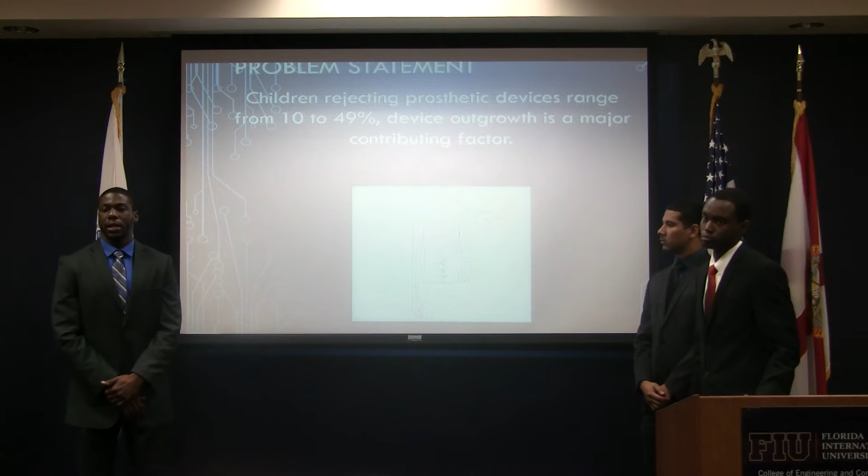It's been recorded that children have been rejecting prosthetics at a rate of 10 to 49%. This has been attributed to the fact that device replacement normally takes place 6 to 12 months after the initial fitting. Many factors have contributed to this, however, device outgrowth is the predominant reason.

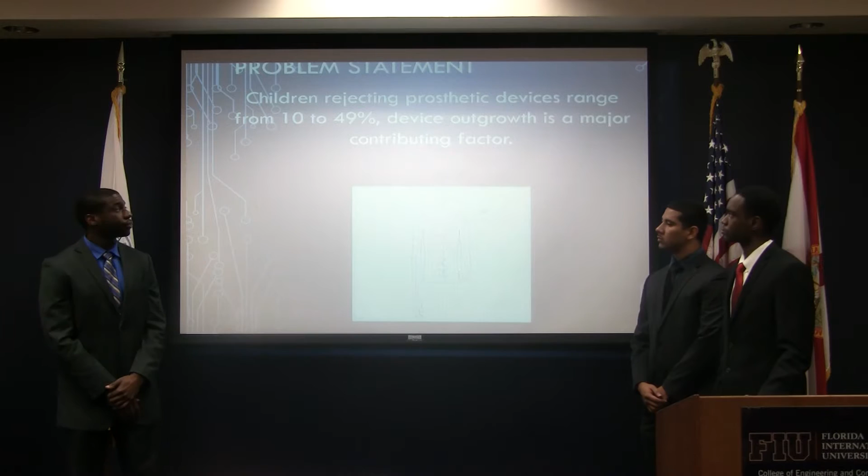To resolve these issues, we created a below-elbow prosthetic limb device that satisfied two goals. It was targeted for children between the ages of 5 to 12 years old, and it incorporated adjustability of limb length and addressed the issue of discomfort.

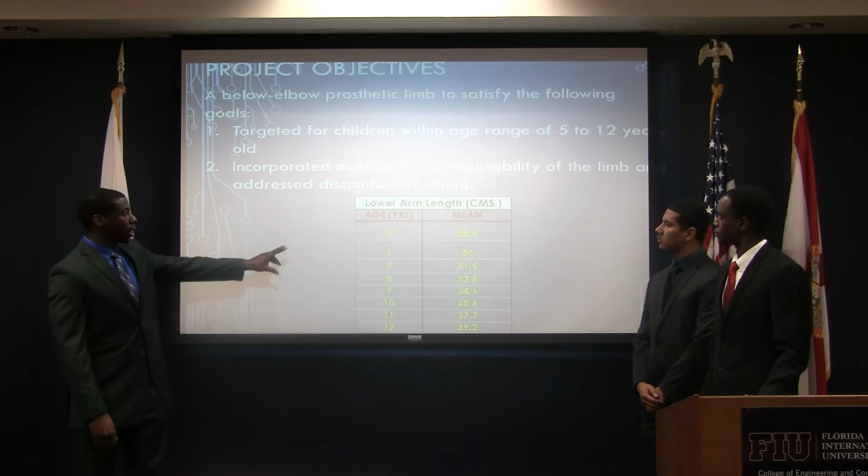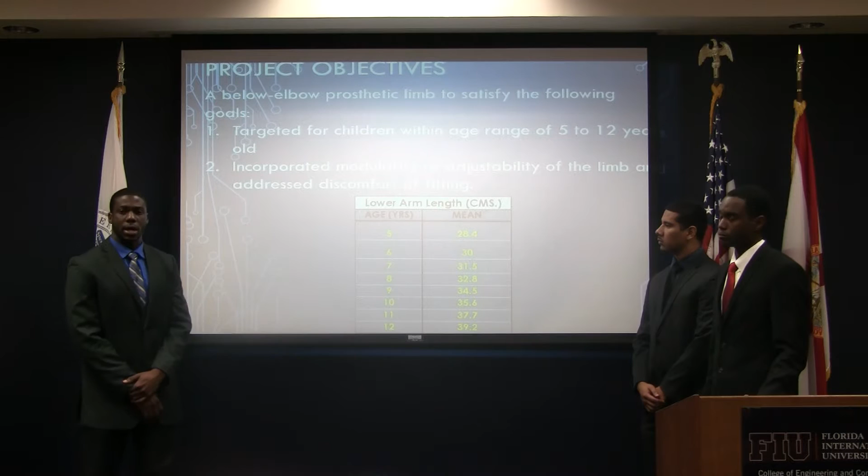As you can see from the table, between the ages of 5 to 12 years old, there's about an 11 centimeter limb difference. For our model, that's too large a gap to factor in, so we decided to divide this age group into two subsections: 5 to 8 years old and 9 to 12 years old. For our project, we're focusing on the 5 to 8 years old model.

The division of responsibilities are as follows: I was responsible for fabrication and documentation, Chris was responsible for testing and documentation, and Finley was responsible for engineering design and documentation.

To clearly define our project objectives, we divided our project into two phases. The first phase involved modeling the prosthetic using appropriate CAD modeling software, such as SolidWorks and ANSYS. In doing so, we conducted engineering analysis by comparing and contrasting materials we could use, assessing the physical limits of our design using finite element analysis, and optimizing our design before furthering on with prototyping.

For the second phase, we developed a terminal device - in our case, a hand. In doing so, we wanted to make our testing more human-like, and for this hand we actually created a mechanical driving mechanism as well.

In order to develop a functional prosthetic marketable to amputees, we had to abide by standards set by both the health system as well as engineering standards. In general, prosthetics are classified in classes, and our prosthetic is a class 1 type prosthetic.

The regulating body that determines whether a prosthetic can be brought out to the market is the FDA, and the critical standards used in the design process are pretty much the same standards as they relate to the process of making plastic parts, as well as the testing methods of plastic materials.

At onset, we established design alternatives for the socket and the wrist. After researching different types of sockets and forms of attachment, including the Wilmer open socket, silicone suspension, vacuum suspension, and osseointegration, we decided to proceed with the Wilmer open socket.

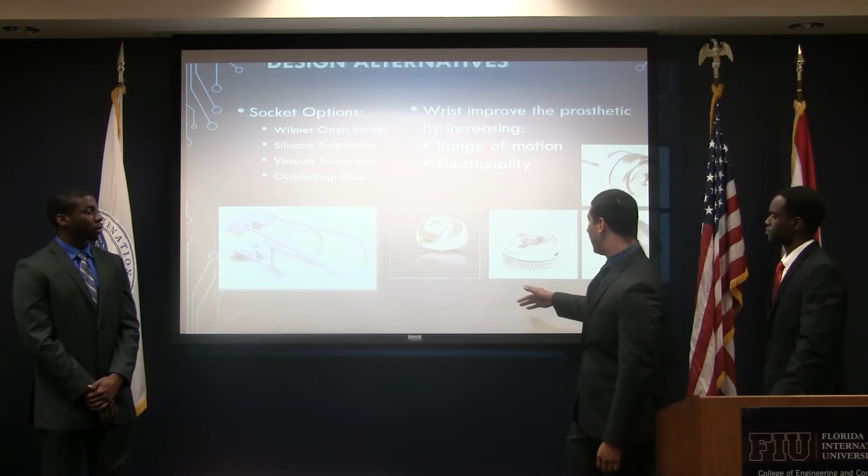Adding a wrist to the component will increase its overall performance by increasing its range of motion and functionality. Here are different images describing different types of wrist joints. The second image described here is the type of wrist joint that we implemented into our design, which is a twisting mechanism.

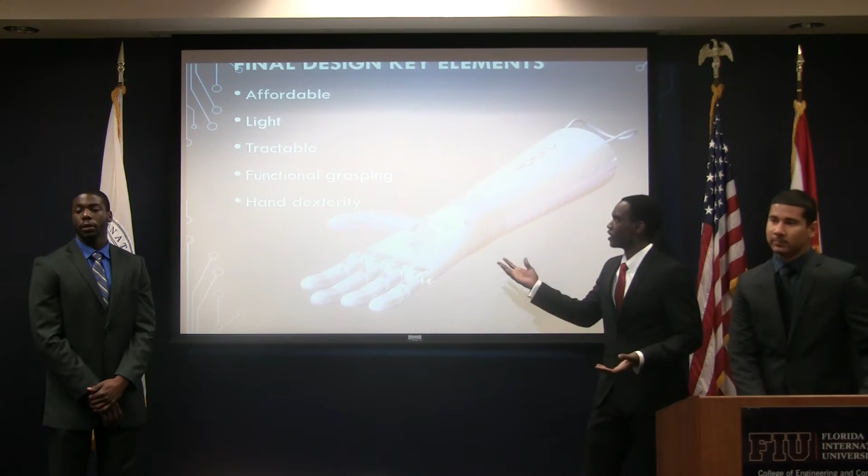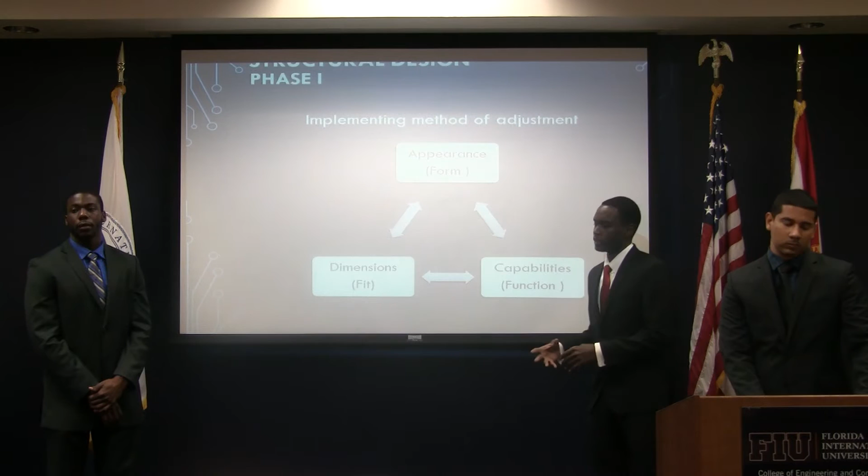Our final design can be summed up into these key concepts: affordability, lightweight, tractability, functional grasping, and hand dexterity. In phase 1 of our design, we pretty much incorporated the tractability of the prosthetic. That was the main focus point of phase 1, and that required us using anthropometric data as a guiding element to fit the dimensions as well as meeting the demands of appearance and capabilities of the prosthetic.

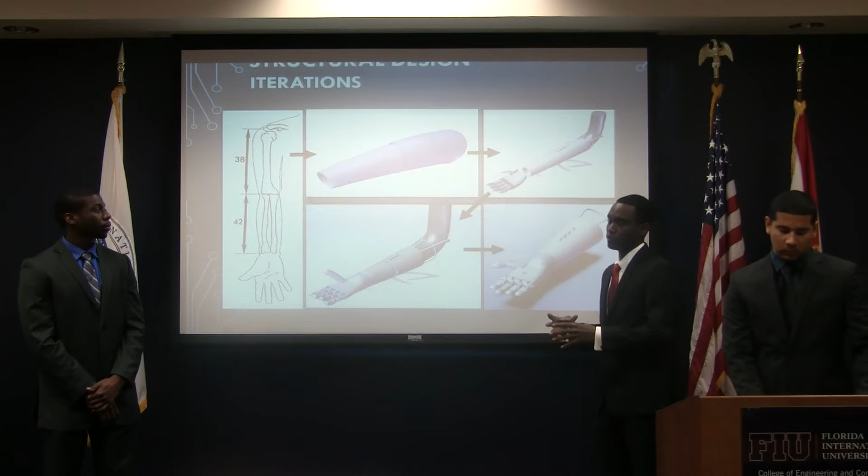In order to overcome the challenge of using that anthropometric data as well as conforming to capabilities, we had to take multiple iterations. At first, we used that anthropometric data to form a mold for the forearm, and then conformed that mold to a residual limb. In the third iteration, we conformed the different segments and joined them together. And fourth, we finally came to a final design by optimizing repetitively.

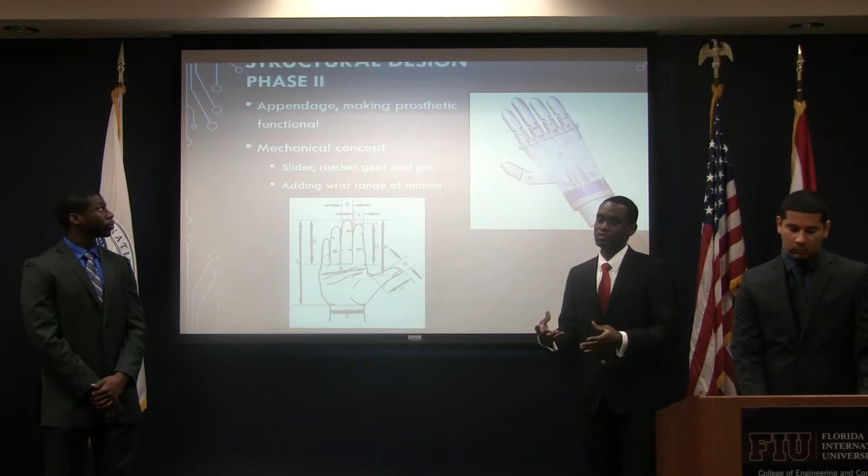Phase 2 pretty much added functionality to the prosthetic. By adding an appendage, we were able to incorporate techniques of a mechanical slider, ratchet gear and ball, and pins in order to add grasping ability for the overall prosthetic. Using anthropometric data, we were able to conform the size to an actual size of the age group we were targeting.

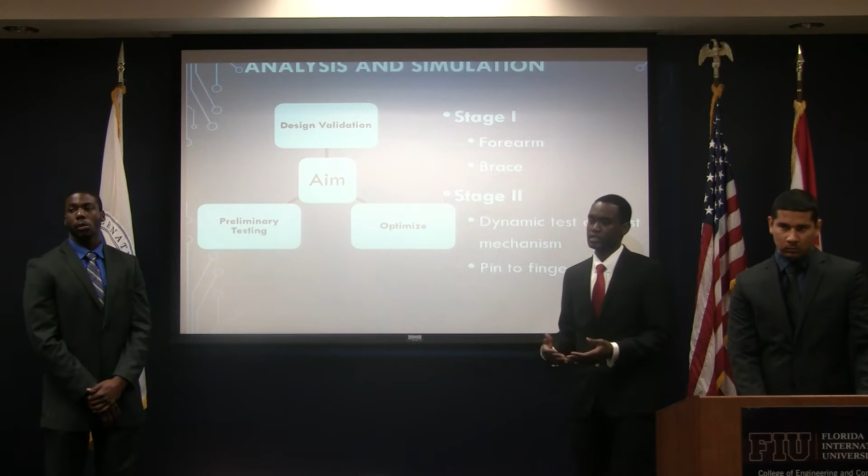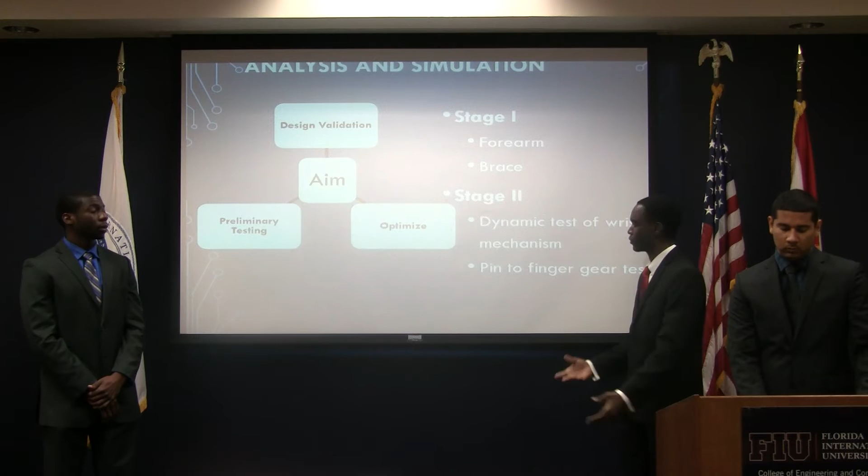The tools we use are ANSYS and SolidWorks to carry out a lot of our analysis and simulation. These tools help us validate our design as well as optimize and provide preliminary testing prior to manufacturing. Stage one was focusing on the forearm and brace, and stage two was dynamic testing of the wrist mechanism as well as the pin to gear reactions.

Now, as you can see, this was a setup of our forearm, our main focus point, to see how we can design a concept whereas the forearm is capable of retracting and extending while being sturdy enough to actually support the child's weight.

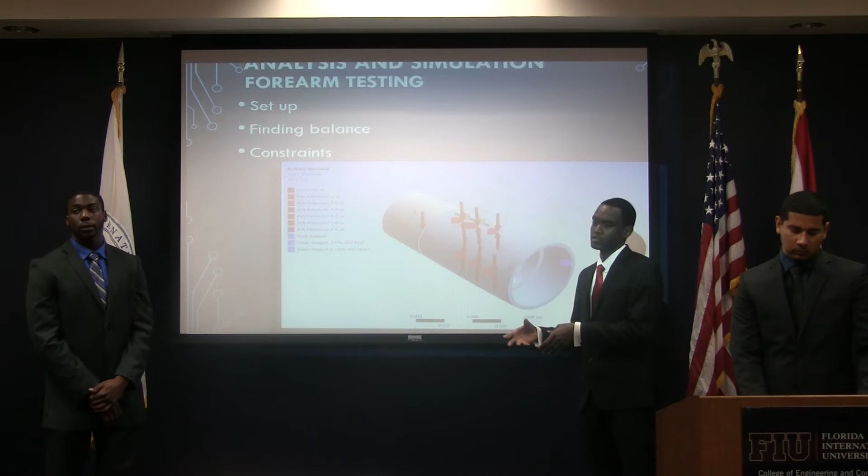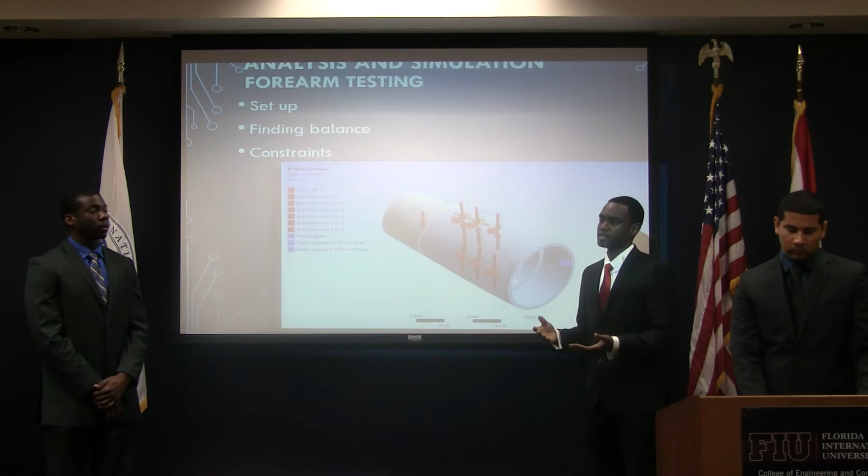Setting up, finding balance, and constraints are all part of the finite element analysis. You have to find the correct balance in order to mimic the actual scenarios of how a prosthetic would actually be used.

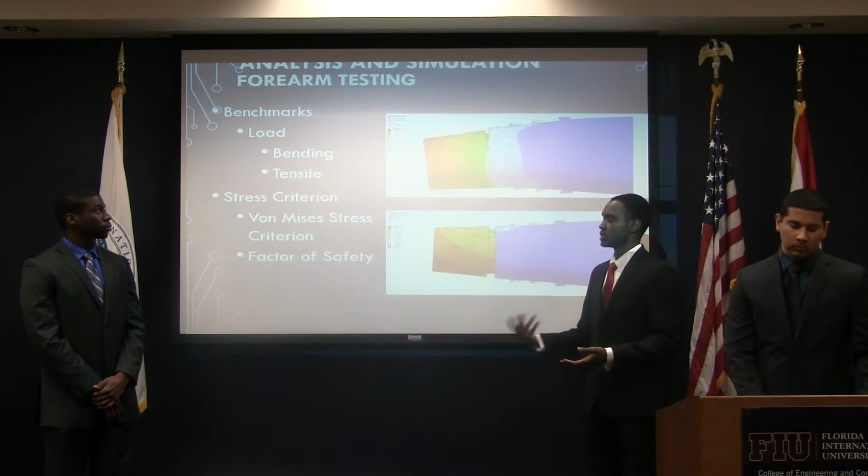Now, multiple benchmarks were tested. We used a bending test and a tensile load, and using von Mises stress criterion, we were able to determine a factor of safety for both loading situations.

Now, after multiple iterations and getting multiple results, we found weak points where we could optimize. Iteratively, we found the best design, and we ended up with a minimum factor of safety of 4.8 in bending and 15 in tensile loading.

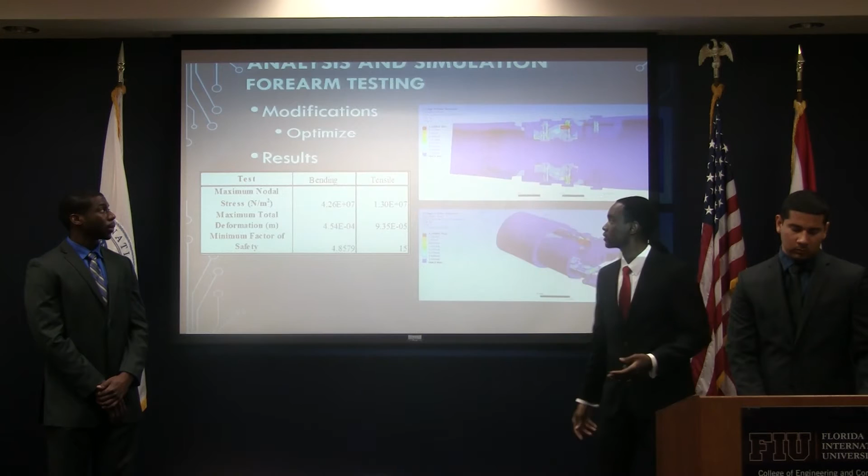Now, similar tests were carried out for the socket. The aim for the socket was to find an optimal material that we could conform to the shape we wanted to design the socket with, and then find material that's actually suited.

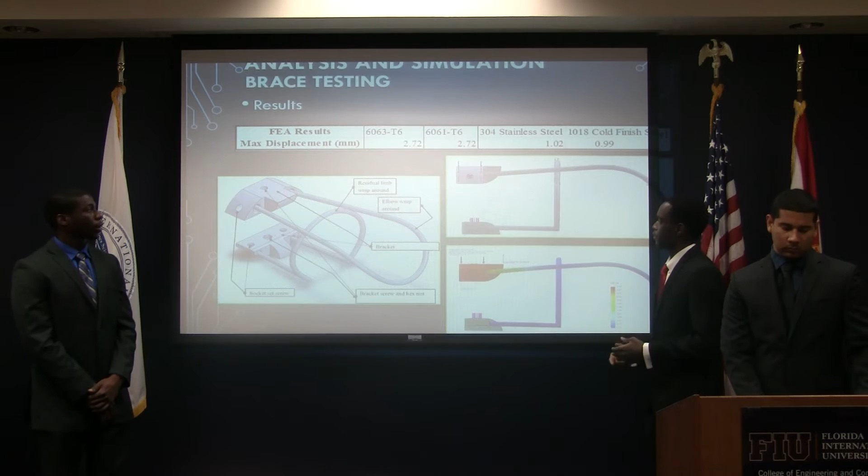So we tested multiple materials. We tested aluminum, 2 types of aluminum, 2 types of steel, and we decided to go with stainless steel, because it gave us a maximum displacement of 1.02 millimeters, as well as a factor of safety well above 30.

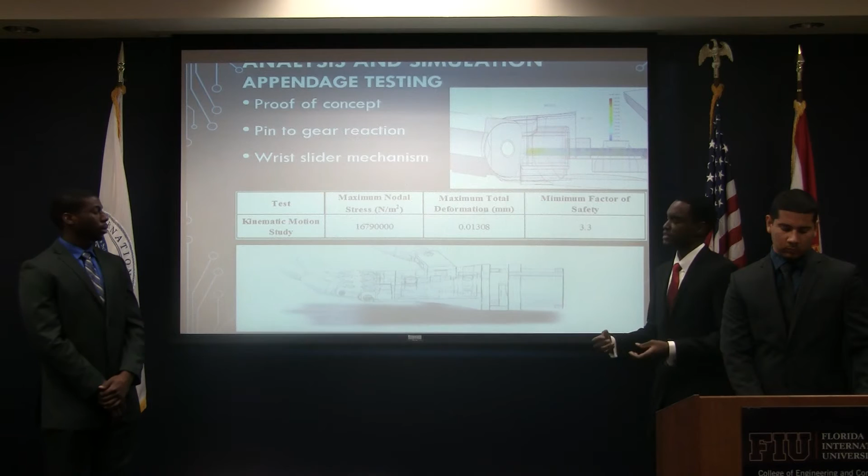Now, phase two, adding appendage, what we concentrated on was seeing if the concept could actually work, as in the pin to gear reaction. Similar to a ratchet and pawl, we pretty much saw what would happen when we applied a torque to the finger and saw if the pin would be able to prevent the finger from extending or retracting. The pin to gear reaction and wrist sliding mechanism all worked as they were supposed to.

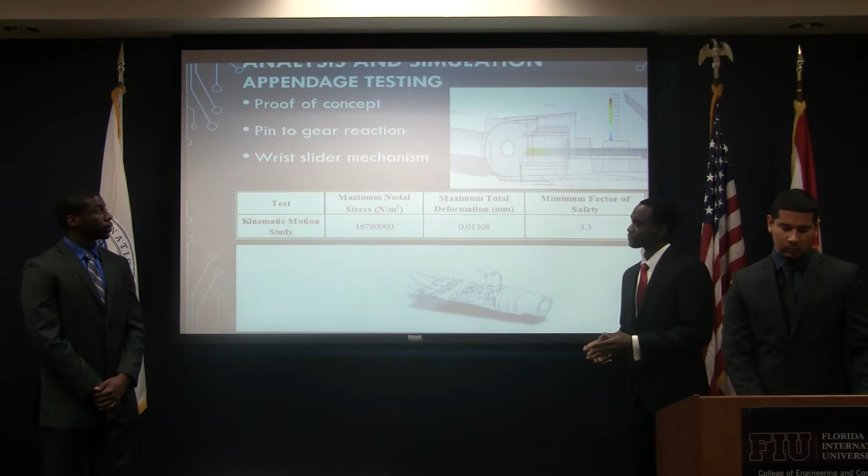So for the manufacturing of the main body of our prosthetic, we resorted to 3D printing. We mainly chose 3D printing because of its easy accessibility, its quick production time, and also because it had a price that met our budget.

So the team decided to take it upon ourselves to utilize our access to nearby machinery to fabricate the components ourselves, and in total it took 2 to 3 days to complete.

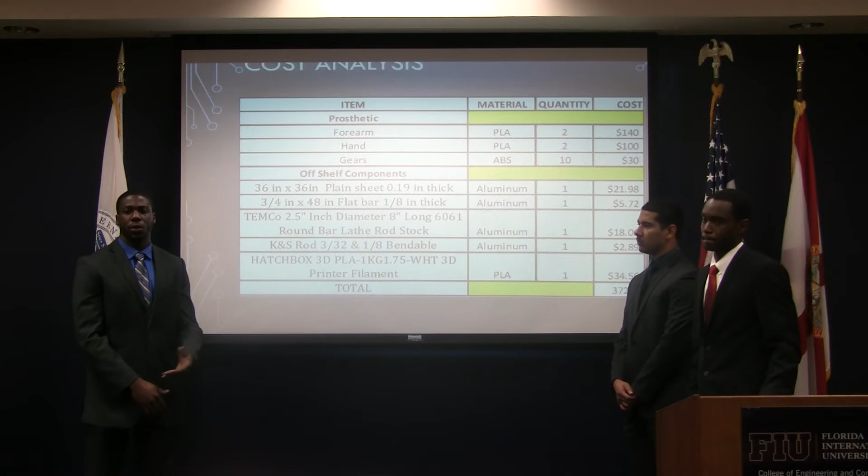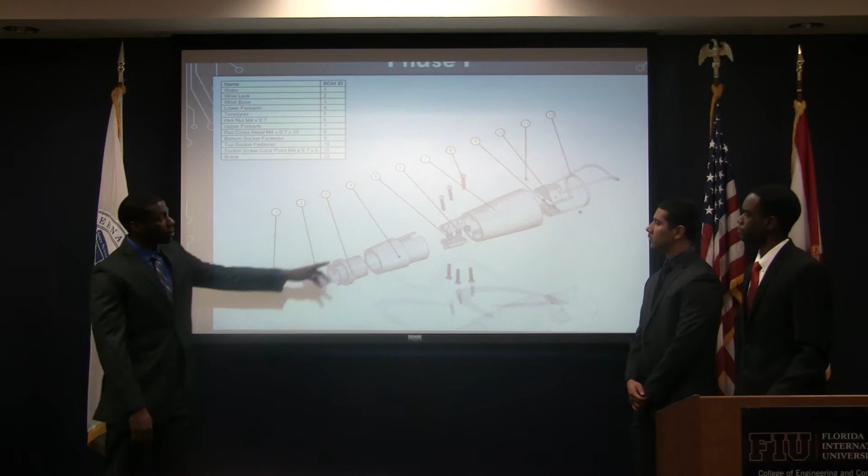Now the elbow socket brace is made from stainless steel, and the screws, nuts, and bolts are also made from steel. Now this is an exploded view of the hand, where the wrist, palm, and fingers were made from PLA plastic, and they're secured by the screws, nuts, and bolts.

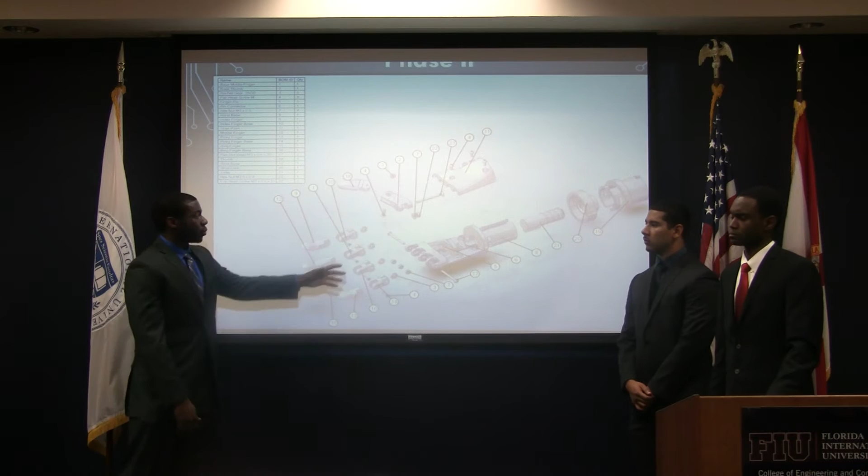The driving mechanism of the hand, which was the ratchet and pawl system, is comprised of the gears, made from ABS plastic, and driven by aluminum pins stemming from the wrist to each finger, excluding the thumb. Now for the construction of the forearm unit, we printed four molds in total, 2 for the upper forearm and 2 for the lower forearm.

These molds were designed to be fitted into one another and then secured by the tensioner fastener and their respective components. Ideally, our final mold, the prosthetic, will be sealed all around to prevent separation of the unit while being used by the child.

Now for the construction of the hand unit, the wrist, palm, and fingers were printed. The palm served as a casing for the mechanical driving mechanism, and it can be removed as necessary to maintain the drivers.

Now, the motion of the fingers was established by placing joints on each finger, and the wrist unit served as an entry point for the forearm connected to the hand, and it also possesses the interlocking mechanism which secures the forearm to the hand.

We designed 3 different experiments that are primarily focusing on the hand. These experiments include the range of motion, range of function, and a loading test.

For range of motion, we explored different open and hand-closed positions possible for the prosthetic hand. For range of function, we explored different configurations that the prosthetic hand might have. And for loading tests, we explored the deflection that the prosthetic hand might have under different loading and different lengths.

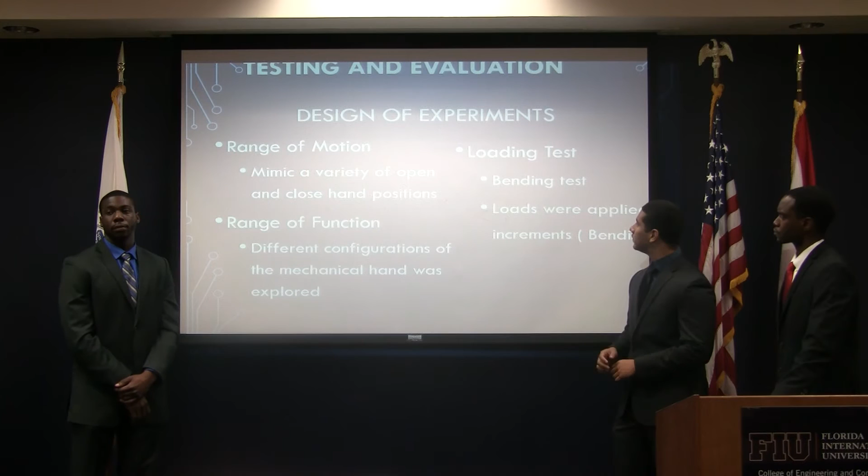Range of motion results are based on the hand grip positions that include the open palm grip, the power grip, and the open precision grip, just to mention a few. However, all these positions demonstrate its own purpose and its own functionality.

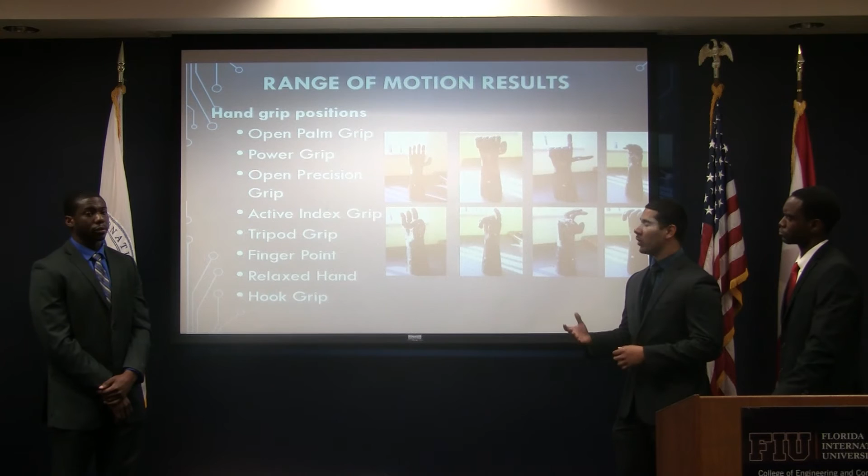The most critical, most practical of these positions include the hook grip and the open precision grip. The hook grip allows the user to hold a cup and hold a bag, while the open precision grip allows the user to hold small objects.

For range of function, we evaluate the ability to grasp and maintain possible positions while holding small objects. We also evaluate the ability to hold an object while being used.

We consider the prosthetic arm to be a cantilever beam. We wanted to mimic the idea of the prosthetic arm being attached to the residual limb. Therefore, different lengths of extension were measured, including 0.20 inches, 0.39 inches, and 0.59 inches. During each of these extension lengths, loads were applied ranging from 1 to 10 pounds.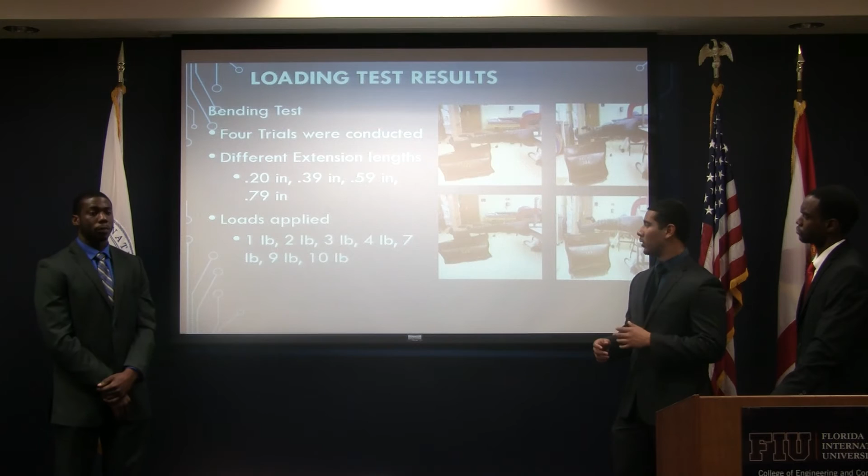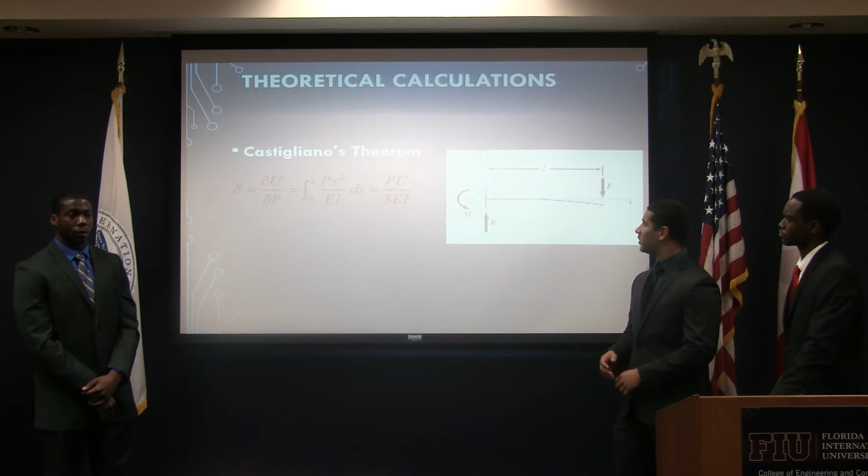In order to evaluate our experimental data, we applied Castigliano's theorem to analyze the deflection for our certain conditions. Here are different tables describing the theoretical and experimental data achieved.

Trials 1 and 4 are compared. In each of these tables, it describes the maximum and minimum loads and their respective deflections. As you can see, they're different. The deflection isn't really off, which demonstrates the overall performance of the prosthetic arm and our proof.

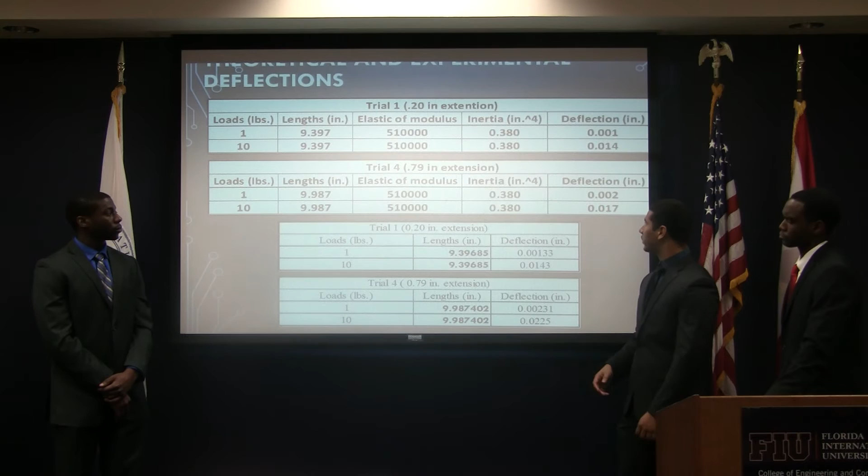Here are different tables describing the theoretical and experimental results. Each of these lines demonstrates the different extension lengths possible of the forearm region. As you can see, higher deflections were caused at maximum extension.

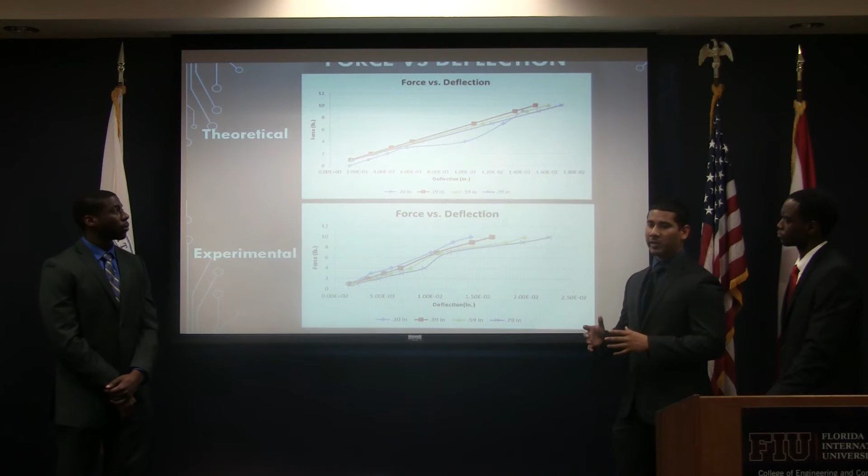Our prosthetic design was geared towards children coming from low-income families and/or not having insurance that could afford them a functional prosthetic.

To keep the marketability of our prosthetic in mind from a global perspective, we intend to outsource our design and the needed software to various health professionals. In doing so, all that's needed is the amputee's residual limb dimensions, and these dimensions can be entered into the software, which would then render our default design to accommodate the amputee.

The material that was chosen was PLA plastic. The manner in which it is stored is very crucial, as PLA plastic is not able to withstand high temperatures. Its melting point is between 173 to 178 degrees Celsius, however usually around 120 degrees Celsius it begins to deteriorate.

Safety precautions must be taken. An adult must physically evaluate the prosthetic arm before any usage for wear and tear, as it can cause direct and indirect damage to the user.

Based on the IEC standards, we recommend that the user give a test trial between 5 to 10 minutes before any usage to get used to it.

In case of any allergic reaction to the materials, we recommend that the child use a sleeve over the residual limb. For sanitation purposes, water and mild detergent can be used.

Another important part we really wanted to look into was how creating this product would impact the environment and sustainability. Using two methodologies developed by the Institute of Environmental Sciences at University of Leiden, and tools for the reduction and assessment of chemical and other environmental impacts, we were able to gauge how this prosthetic would affect the environment.

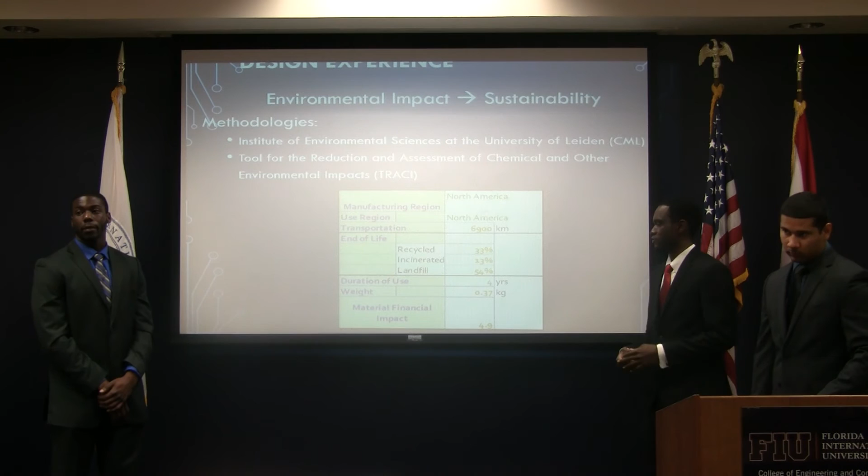Considering this prosthetic was developed in the North American region, we ran the algorithm and found that 33% of the prosthetic is recyclable, 13% would have to be incinerated, and 54% would go to landfill. We think these values are very conservative,

but over a duration of 5 years, that's not bad considering that a child grows constantly and we'll be using one prosthetic for 5 years. The prosthetic only weighs 0.37 kilograms, which is very light, and the material financial impact is 4.9 on a scale of 1 to 10.

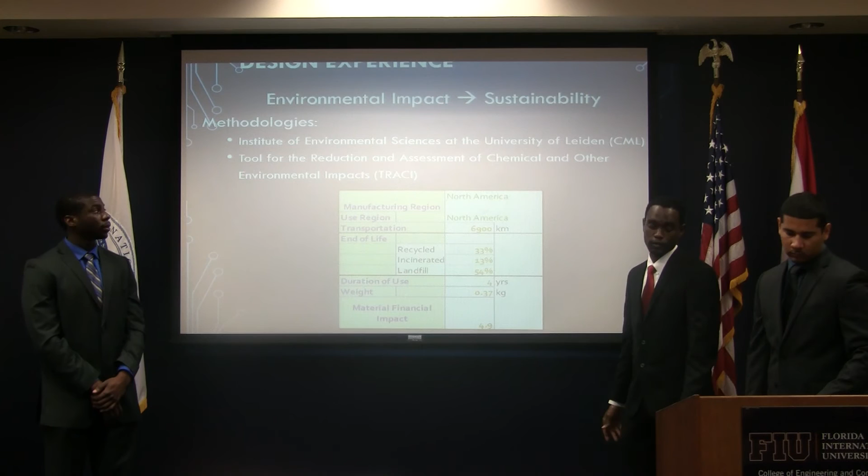Throughout our 8 months of actually designing and fabricating the prosthetic arm, we learned the true values of communication, team collaboration, and time management. Using these values, we plan on implementing them into our future work as future mechanical engineers.

Throughout the project, we've encountered a lot of challenges. With every challenge that we encountered, we gained a lot of lessons, and we had to figure out how we can overcome them. And in the project endeavor overall, we created our physical product. We achieved what we wanted to achieve.

To see if we can create a retractable prosthetic that a child who has lost a limb can probably use for a period of time. We think the prosthetic would be marketable if manufactured in appropriate material. The retractable concept, I think, is feasible, and the functional appendage needs improvements. Driving mechanisms would be a major help in actually being able to make the prosthetic much more functional.

So for future work, it was noted that improvements can be made to the hand function, like Philly said. If the user wants to stick with mechanical motion, we were suggesting adding an elbow or shoulder pulley to increase the mechanical motion, and also integrating a myoelectric control system. For everyday use, for aesthetics, the user can cloak the prosthetic arm with a skin layer.

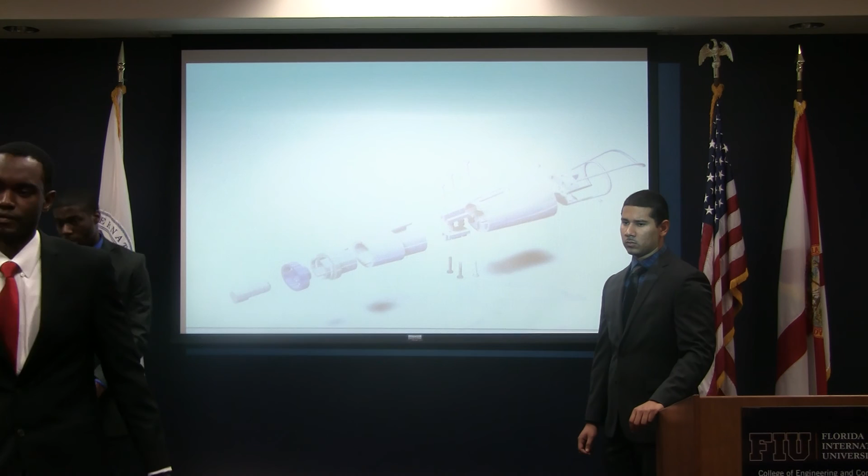Is there enough bite here? Is that bite enough to keep this from flexing on a person? Yeah, that's a question. That socket is not budging. And ideally, we would like to weld both pieces together.

And then, are there any thoughts of a future wrist? Yes. So the wrist that we incorporated into this is a revolute wrist. So this will rotate? Yes, this can rotate. So the wrist can rotate. We added that after our advisor told us that we needed to add rotation to the wrist.

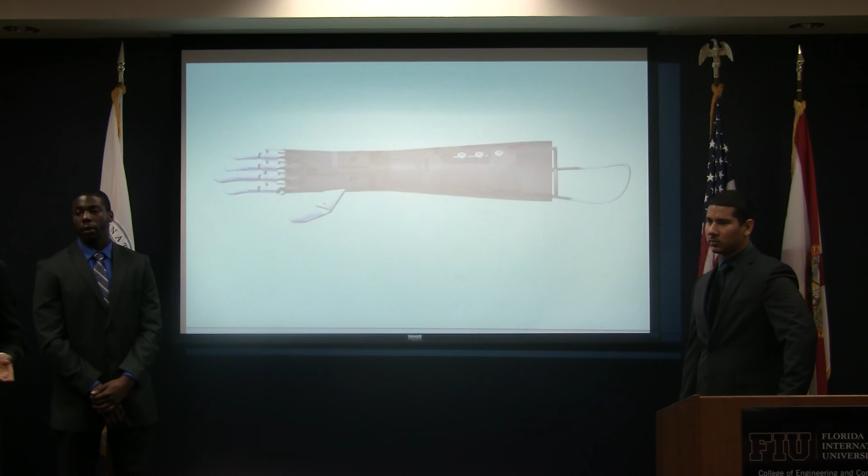So this piece right here, it's like a nub. If you could think of a zip lock mechanism on the inside, as you turn it, it pops in. Oh, so like a ratchet? Yeah, just like the gears of the fingers are ratchets, the inside of the wrist is also like a ratchet. So it could only turn up to like 120 degrees in one direction. So the patient would rotate it with their other hand and then be in the right position? Yes.

Can you show me how it functions? How you get the fingers to move? So there's gears on each finger, right? Working off the back end, can you make the fingers move? So the individual will grasp whatever they want to while it's in a locking position, and the pins will, just like a ratchet and pawl, lock up, okay?

And then when they want to release it, they just turn this wrist part here, and then it's in an unlocked position. Once it's in the unlocked position, the pins move back inside. There's pins in here that move back when I turn this, and then they can release. You see? So the opposite hand operates the hand. Yes. So in other words, it doesn't work from the stump.

I was actually thinking you're using the arm piece to put the tension and pull. No, we didn't. That's what we want to. In future work, we want to add some kind of mechanism that attaches to a shoulder or elbow, where they can withdraw their elbow or shoulder and pull. Yes, that's what we want to add eventually. Current prosthetics nowadays that are myoelectric work so that if they flex their triceps, they close.